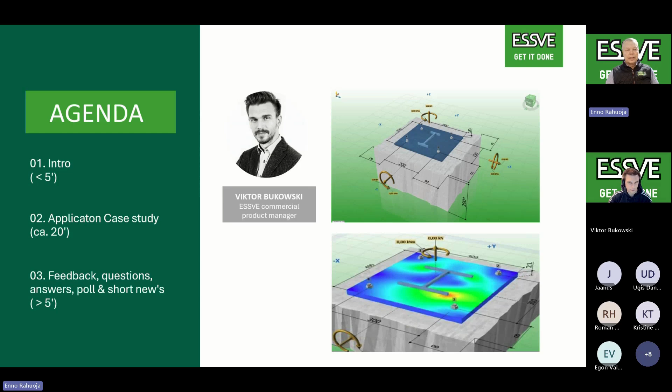study. From the business idea, in Nordic, we are available in 1,100 different retailers. We are founded in 1970. We have our so-called branch offices in 7 countries, total 200 employees, and we belong to the Bergman & Beving Group. Cool message is that we sell roughly 5 million ESSVE screws every day. Today's subject, like always, we talk about foundation and structures, but we go more in the bottom here, not in timber, but this time in concrete structure and installation areas.

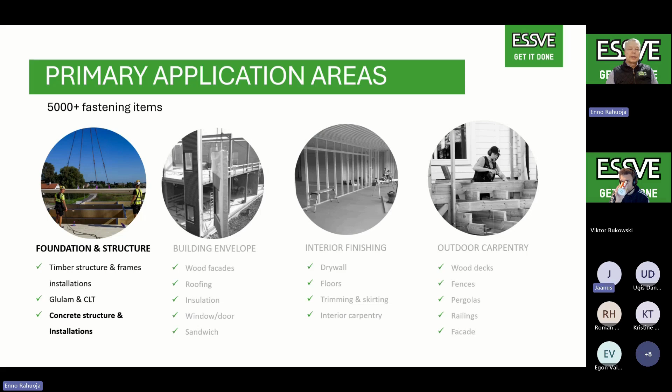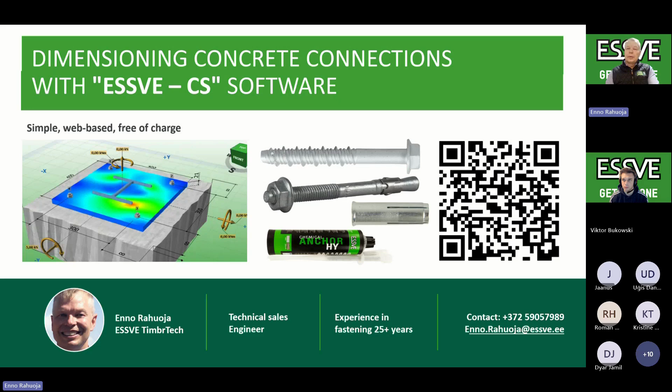So maybe a light introduction as well on technical experts here. Radek is our best person who will help you on demos in Eastern markets. Of course, we are willing to come and visit you. As mentioned, Viktor is our product manager, and I'm in sales, technically supporting. Software is available. Find it out. Hopefully you have already tested. And I'm not going to speak any longer. I've been in the fastener business roughly 25 years. So all open questions in the end are welcome, either verbally or in written way.

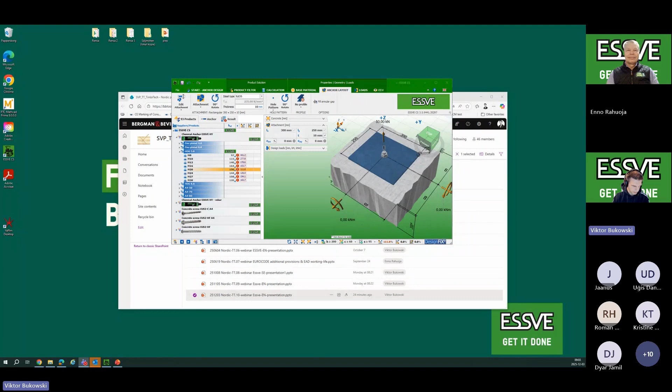But here we go. Viktor, you as our senior developer and experienced engineer on product management, go ahead, the floor is yours. Thank you. So I will start by sharing my screen and start presenting. Do you see the correct green slide with the product? I see the range of products now. Yes, so we will do a brief introduction to the products that can be found in the software, and then we'll talk a bit about the software afterwards.

So first of all, we have the classic wedge anchors there on the left side, and these have existed for a very long time in the market, primarily intended to fasten steel to concrete, I would say, and we offer them in carbon steel and in stainless version, and in a lot of lengths and dimensions.

Next, concrete screws we think are perhaps a bit more modern product, and here we talk about, of course, concrete screws that don't need a wall plug. They can be installed directly into the concrete after drilling, of course, and it's very easy to install compared to all other concrete fasteners, I would say. So easy installation and also easy to remove, which is good from a sustainability point of view in terms of when the building will no longer be used in the future.

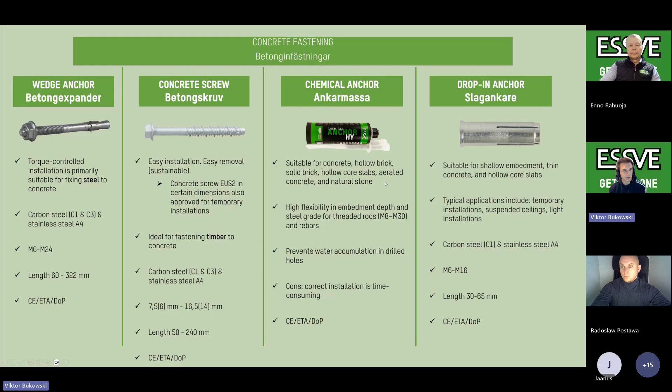And a service we offer is, of course, pull-out testing. A lot of the time, especially when you do testing in tension, it's not the steel that will fail, but it will be the base material that is the weakest part of the fastening, so to say. So here you can actually check what will be the capacity of the anchor based on that. I would say it's mostly useful in lightweight concrete or bricks, and less useful in pure concrete. But it is a service we offer locally, so contact customer service.

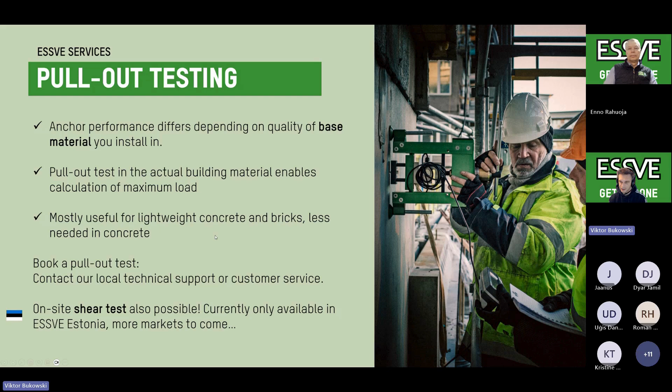And also shear testing is something we have started to offer, so far only in the Estonian market, but this will become available in other markets in the future, if that's of interest.

Then another product I want to mention, it's not in our software, but it's a very good product specifically for lightweight concrete. This is a product that we actually do a lot of pull-out testing with, and the capacity is very good in solid bricks of lightweight concrete. It becomes very similar to the capacity that chemical mortars have, because again, it's the base material that is the weakest, not the steel in the screw. And this is also covered by a CE marking and an ETA for the long setting depth, so 100 millimeters and 160 millimeters is required for that.

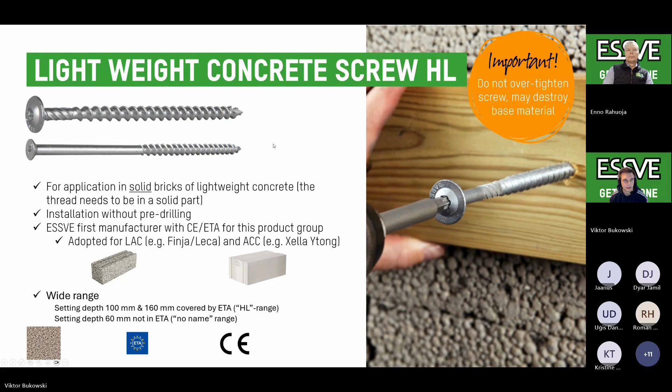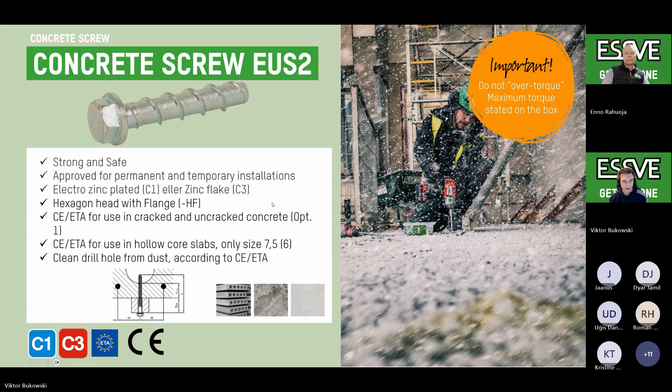And then a little bit about the concrete screw that I already mentioned. It has a wide range of applications, of course, permanent installations in cracked and non-cracked concrete, also in hollow core slabs that we show in the picture here below. There you actually want to install it in the hole, so you don't hit the rebar on the sides there, the black dots. We'll talk a bit more about this product when we go into the software.

But we also have this reusability, what I mentioned with the sleeve, that you can test the thread, see if it's still usable, and then you can use it again for temporary installations, such as safety rails and bracings, for instance, if you're setting up walls of the building.

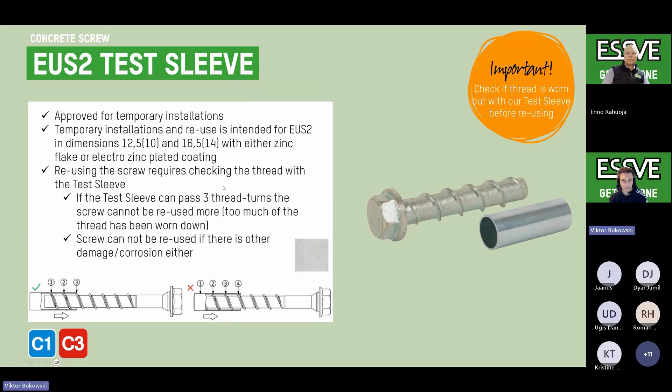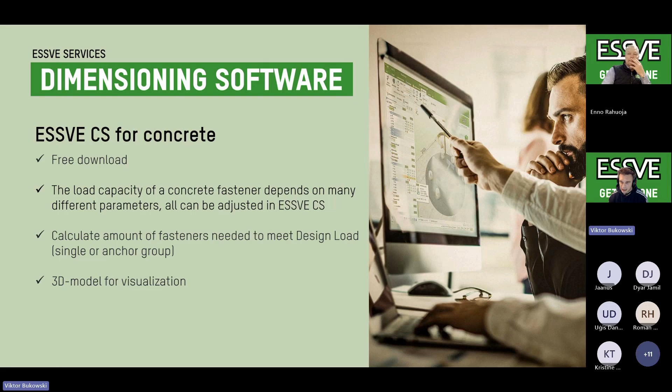So now we'll start going into the software. It's a free download, a desktop software, but it's very intuitive and easy to use. I will show that. You always get a confirmation from the software: is this working or is it not working? And if it's not working, then what's the reason? I will show that very quickly, so I will not talk more here.

I think the easiest way to find the software is actually to click through on our website, and you want to go to our concrete page for engineers, for designers. That's available on our local sites here.

The design in this software follows the Eurocode. This is the first generation Eurocode, but it was actually published quite late, in 2018, and it's the design of fastenings for use in concrete. This Eurocode is very similar to the previous methods that were available for evaluation, the ETAG methods and various EOTA documents. And for a while, we also had the CEN/TS technical specifications that were very similar to the Eurocode. Small differences are described in the standard for those that are curious.

So how does this Eurocode work? Well, it looks at all the different failure modes, first of all in tension. Like I mentioned, steel is a failure mode, but it's usually not the one that occurs for fasteners. More common is B here, a concrete cone, so you basically pull out a large chunk of the concrete. Another quite common failure is pull-out, where the fastener is pulled out and there's just a hole left. The concrete is strong enough, but there's a local failure around the fastener. And then D is a special variant of that with bonded, which is the chemical anchors.

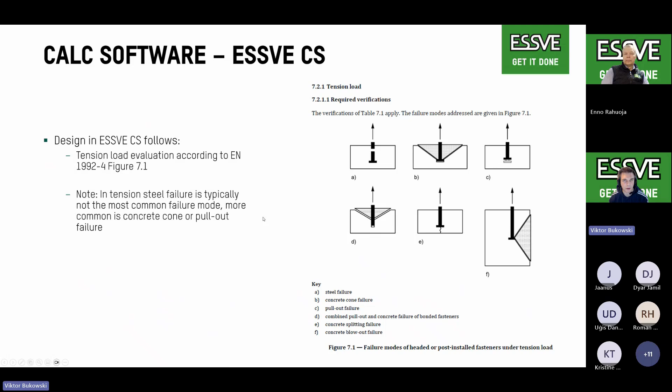And then on the shear side, steel is actually more common as a failure mode, and also if it's installed close to an edge, it will definitely be a concrete edge failure. So that would be D.

And it can be important to mention here that when you have a shear load, it counts from the, what do you call it, flush with the concrete surface. So if you have the force acting higher up on the anchor, you actually get a bending moment on the anchor itself, and that reduces the capacity quite a lot. And this can also be accounted for in ESSVE CS, but in special situations. So the most common situation is that you actually have the shear load on the plate.

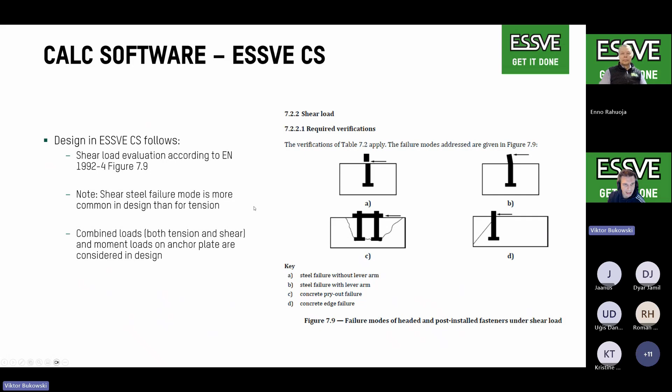I will jump forward. Another important thing to keep in mind when you design is cracked and non-cracked concrete. And this is described also in the Eurocode, like how do you assess if the concrete can be considered uncracked. But the safe side is, of course, to assume that it's cracked. In this evaluation method in the Eurocode, you need to have high compression basically, and then it can be considered uncracked. But if you're uncertain, it is always conservative to assume that it is cracked and that the concrete is in tension.

And this, as the Eurocode points out, considers the full service life of the fastening and the construction, not what it looks like when you install the anchor. Is the zone in this building in tension? That's the important question that you need to answer. Unfortunately here, ESSVE CS doesn't help you in any way to determine this. It's just a design option that you have to consider in the software, if it's cracked or not cracked.

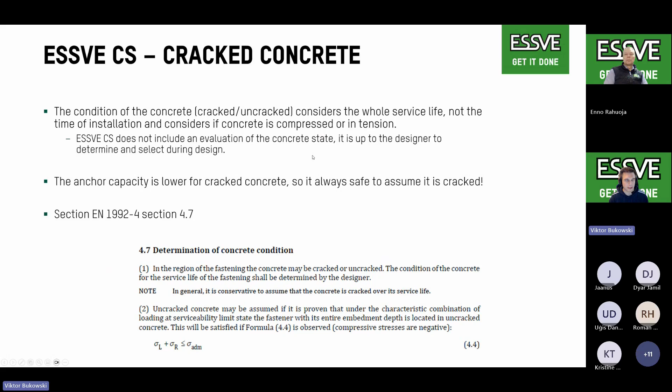And then some common questions that we get, like why can't my connection look like this in the software? That is because the software follows the Eurocode very closely here. These are the patterns, so to say, that the Eurocode allows, so that's what we can do in the software. And does the software support timber to concrete connections? No, not fully, unfortunately.

The Eurocode is written very much so that it's a steel plate that helps distribute the forces down to the anchors, and that the anchors are loaded very symmetrically, or they have a combined effect thanks to the steel plate. So if you want to do a design for timber, you have to check the timber side of the fastener, with head pull-through, for instance, or shear on the timber side of the fastener.

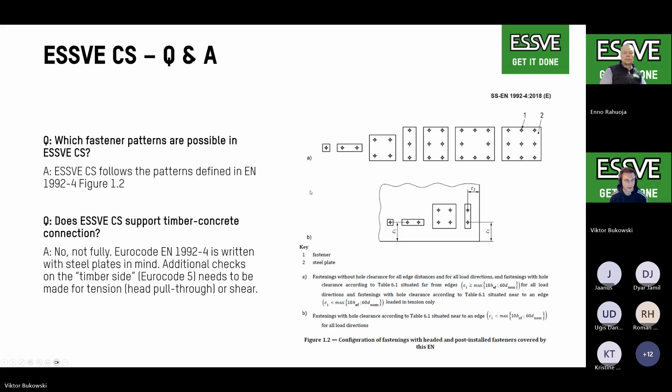And then just a quick mention that load tables are of course nice, but they have their limitations, and we will look at some of those today. In almost all load tables, not just the ones from ESSVE, you don't consider edge and spacing effects. So it's just a single anchor in an infinite concrete slab, in a way. And it's usually also a pure tension load or a pure shear load, so not combined loading. If you have both a little bit of tension and a little bit of shear, that's not directly accounted for in the load tables.

And then for our concrete screw that I mentioned, we have tension and shear. We actually also have shear when you put it at the smallest edge distance. So there you can see that you have a very large drop in the capacity if you install it very close to the edge. And we also have load tables for hollow core slabs.

These are not in the software, but they're kind of easy to evaluate, since you're limited in how to install it, and you just follow the spacing distances and you're good to go. So the software is more for when you have a plate that you want to design properly, I would say. Same with temporary installations. You have a capacity, just follow the spacings, and it's fine, so to say.

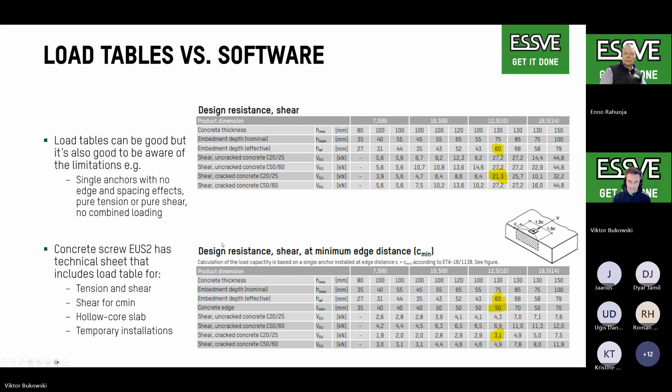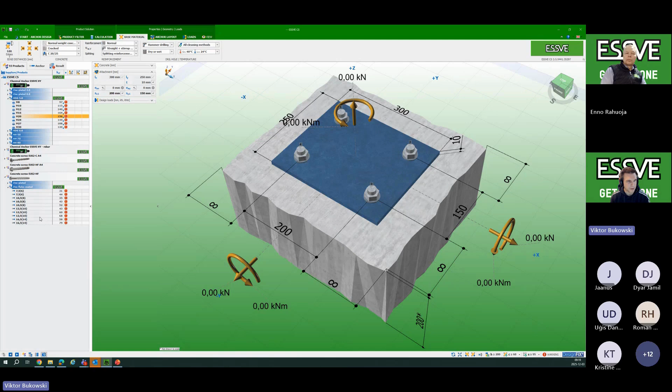We will look at the concrete screw, and we will look at this one. As you can see, we have four anchors currently, but we will start by looking at a single anchor. So, oops, we'll change here so that we have a single anchor.

And we'll start by applying a shear load. We're doing 21. You can see here I added 21, and then you actually see on the arrow that now the direction of the force is going from left to right. If you want, you can click the arrow, so now it goes the other direction. You can also do this directly in the input. It's a bit more difficult because here you have to consider the symbol. So if it's a negative or plus, you can flip the direction like this, but we want it pointing this way.

And here you can also see that we have infinite edges in all directions. So now what happens? We have a capacity of 21. That's basically full capacity. We can click on the results here, like why is that happening? Okay, we have a concrete failure. So that means it's not a steel failure, it's a pry-out failure.

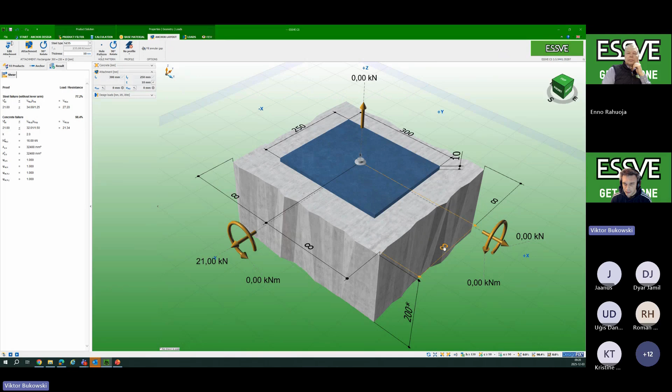And what would happen if we install it closer to the edge? We can try to do 40. And then we can see here already that 40 is too little. We have to increase it to 50. That's actually the minimum amount for this anchor. Okay, 50. But we still have some error. The attachment protrudes from the concrete. Okay, so then we have to reduce the size of this. And now it works.

So we have a much higher utilization here, 670%. So the capacity is only 3.1 kilonewton, and that was what I showed in the load table. So it's reduced dramatically for this shear load.

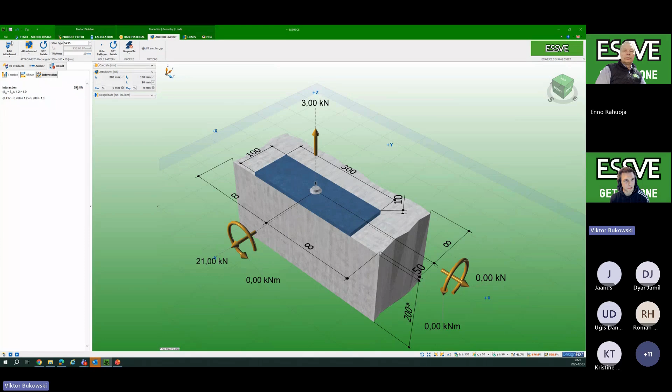We could also apply a tension load, but how much can we actually apply when we're utilizing so much in shear? Well, we can perhaps only add 3 kilonewton, and then we can see. No, of course, this will not work because we have the edge distance here. We'll remove this edge distance, so we go back to infinite. And then it actually doesn't work because of the interaction. We're at 105%, so it's a little bit too much.

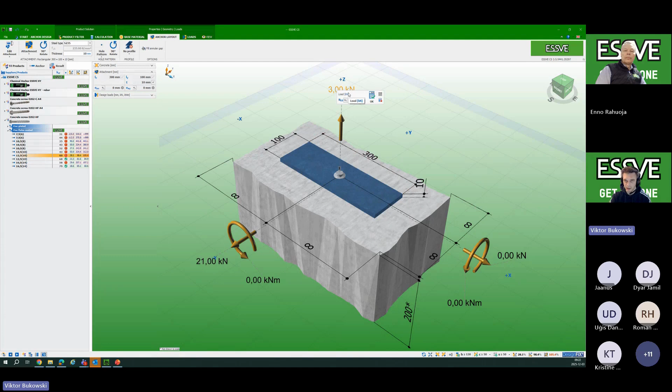You can also see it here. Here's the tension, here's the shear, and here's the combined. But if we lower this to 2, yeah, that works. So now we're at 97. And of course, if we remove the shear, now we can utilize a lot more. Here we're almost doing 20%. So 10 will be the actual maximum that we have in tension. So this is what you can't really get directly from the load tables.

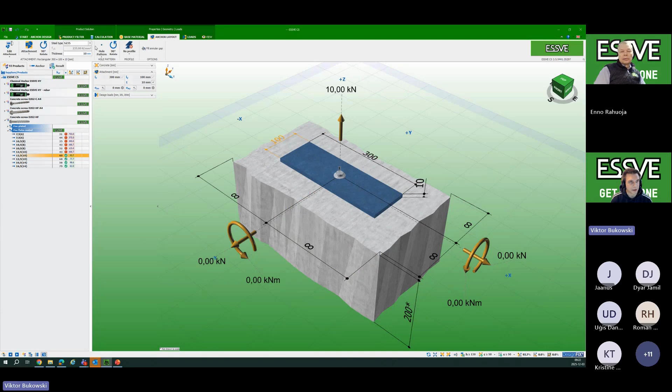And what else can we look at? What happens when we have 2 anchors, for instance? Then of course the capacity should be doubled. And in this case, we can increase it here. Of course, it's fine. So why is that? Well, again, we don't have a steel failure. We're not even close to having a steel failure. It's a concrete failure. So this means it's the concrete cone that is the failure. So both of these have a concrete cone that's governing the failure.

But if we put them much closer together, how close can we put them? Well, can we put them 30? That's very close. That will probably not work. No, that doesn't work. But we can actually put them at 50. Okay, so then it's still a concrete cone, but this concrete cone is now shared between the anchors. So it's quite small for both anchors. So the capacity of 2 anchors is not doubled anymore. If you remember from the single anchor, it's approximately 10, but now 2 anchors only have 13, almost 14 kilonewtons in capacity. And that's simply because they're installed so close together.

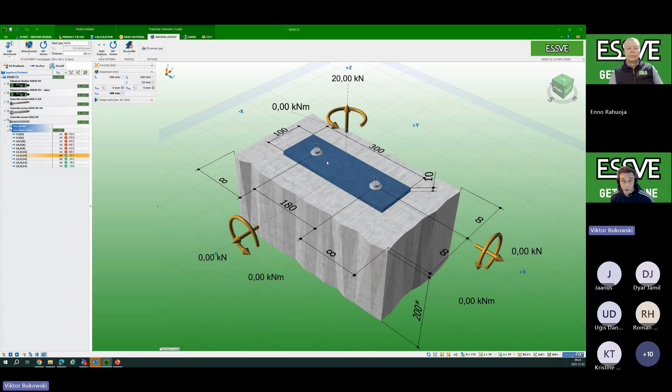So how close can they actually be installed to have full capacity? Well, I happen to know that it's 180. So I will input that here, and then you see I have the full 20. How can I know that it's 180? That's maybe not so easy to remember, but the setting depth of the anchor is 60. And if it's 3 times that value, then that's the full capacity of the concrete cone, so to say. So then we have two cones actually. The full concrete cone is available for both anchors.

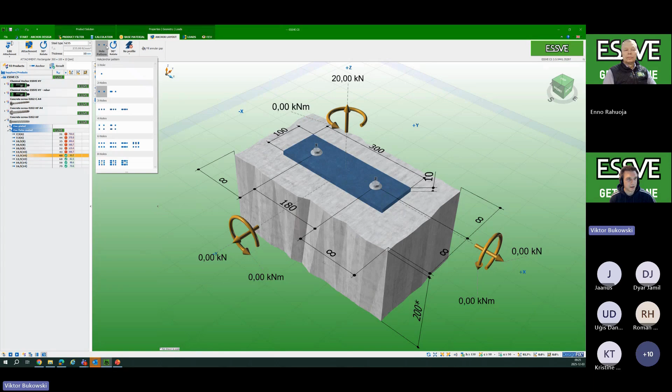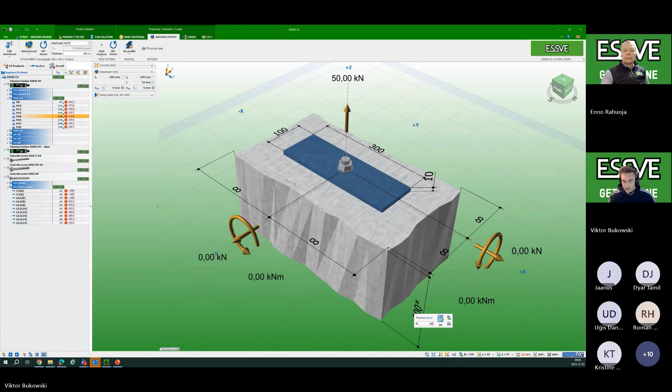Will it work? If we pick the M16, for instance, or M20, it doesn't seem to work. So why doesn't it? Here, the tension load is 111. So what's the failure? It's not the steel, so it's concrete, but we know that this anchor could be put deeper than 150. So what's limiting us? Well, in this case, it's the actual thickness of the slab. So if we increase the thickness, and then we have to click, oops, we could have tried this in a different way also, but sorry. Why is this not going away?

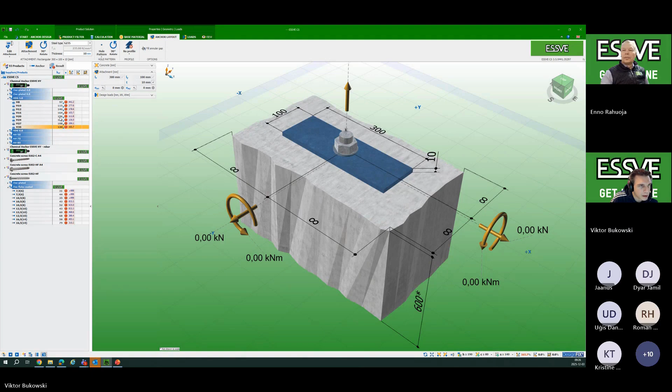Seems I've got a bit stuck. Did we? Here you have raised the hand, or? Yeah, I think if you reduce the load, Viktor, because 50 kilonewton is too high for one. Yeah, I know what you mean, but maybe it is too high. It's a bit weird that it doesn't show. Now it works. Yeah, but it should have shown the error. Okay, but it works with 40.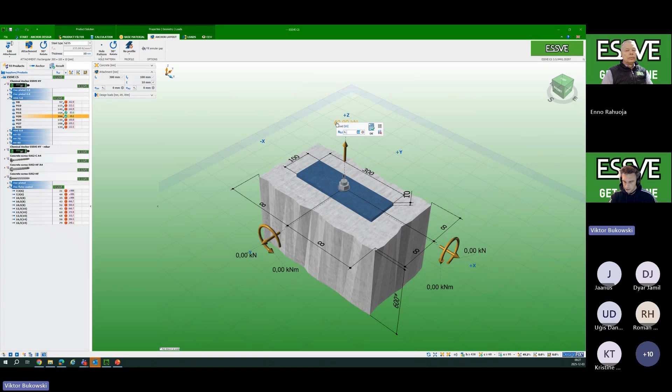What I wanted to show was that it increases the setting depth. Now it has become very fixed, so it doesn't increase it, because we have the possibility to put it at 400, and now we only have 50 capacity. So then we could do the 50. So that should update. I don't know why it crashed a bit here. Maybe I need to restart the software, but it should be more flexible than it was in this little demo. Now it's still locked. Okay, but that's basically all I wanted to show.

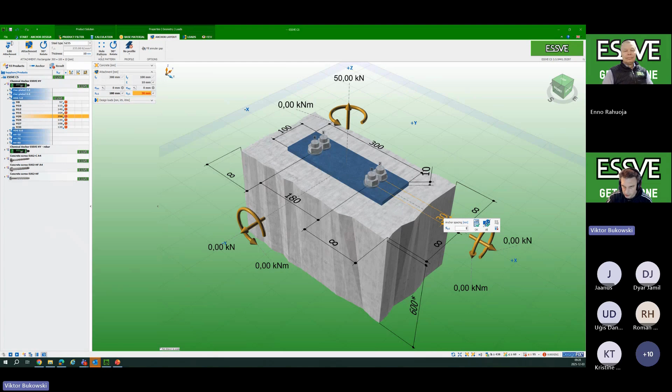We actually have a little bit time left, so we can do one more thing. So we jump back to 4 anchors. We increase the spacing here to, oh no, not 400, 100 maybe is fine. Then we have to make the plate bigger. Oops. 200. We'll remove this, and we'll add a bending moment instead.

So then this bending moment has to be taken by a force couple. So 2 of the fasteners are being pulled, and then the plate is being pushed on the other side. If you, oh no, okay. Thought we would be able to. I will need to restart my software. Something is not working as intended with the chemical anchors, unfortunately. Okay, but that's all for the demo.

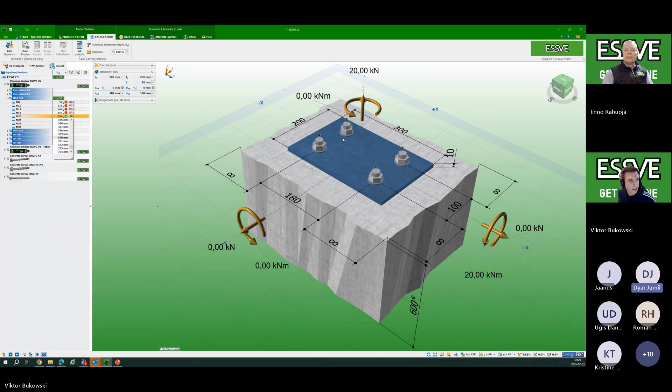And so if there's any questions, you're allowed to ask them. Dyar is raising his hand. Yes, you can add to that, because you have the ability to check the steel plate too if you click on it. Yeah, I know that's what I wanted to show, but I think I need to restart this. It's not cooperating completely. Are you planning to show another opportunity, or are we close to the time as well? Yeah, we're close to the time. I can, if I quickly manage to.

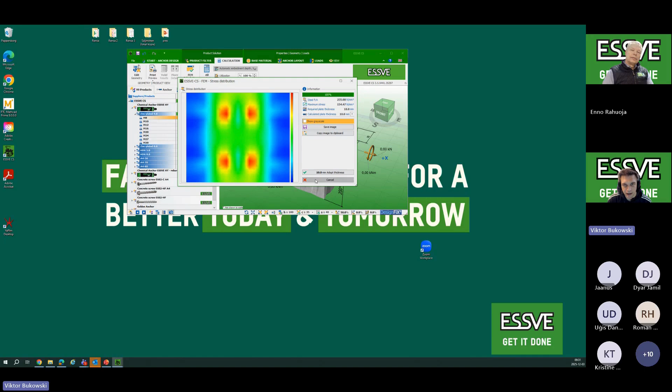I think it's because I removed the profile. Actually, I think that was the reason. But now we can do this simple finite element calculation to see if the load applied needs a thicker plate. Now it works with a 10mm plate, but we could have, if we only had 2 millimeters, for instance. Yeah, it tells us to adopt a 10mm thickness. So that was it. This is also available as a feature in the software. But now the demo is complete.